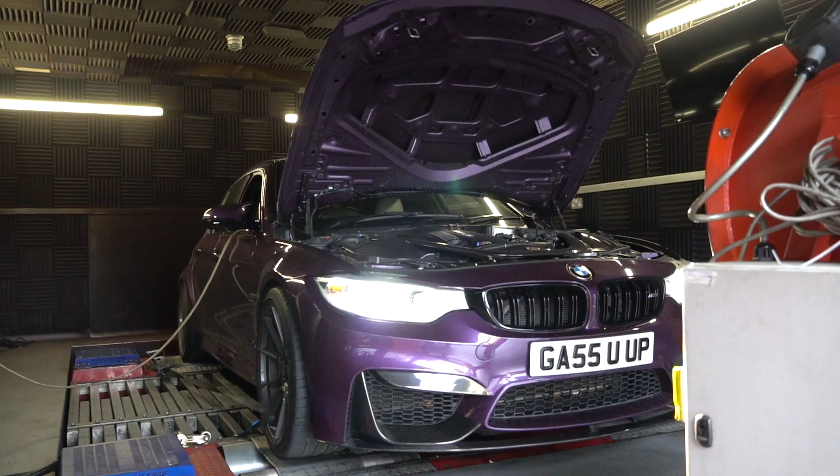Now today guys, we are back down at Devil Developments with the Littco team. I'm in the M3 and guys, today we are turning the power levels up. This should be sick, so stay tuned and let's get it.

So guys, yes, as the intro said, today we are down at Devil Developments. Unfortunately, I've got to kind of give you this quick talk in my car because we're on the back end of a crazy storm. It is so windy outside, you're just not going to hear what I'm saying. But anyway, finally, we are back down at Devil Developments with Littco. And we have my M3 and we're turning power levels up.

Those of you who remember the last video when I actually came down to Devil Developments with Littco and got the hybrids, the L640 hybrids fitted, would know that because at the time we didn't actually have the crank hub capture plate, we didn't actually turn the power levels right up. So all we've done is fitted the hybrid turbos along with some other bits and bobs, and we left it running on the stage 2 boot mod map that was already on.

Now we've actually had the capture plate fitted. In fact, I went back the following week and got the capture plate fitted, but because of time and everything like that, and because we wanted to get a custom tune on this, we didn't have time to do it then. So it's actually been a while since I put out any content on the M3, and a lot of people have actually been asking for it, and it's been a tricky one. I've just been kind of focusing more on the features, you know, my car features, and also the STLs, trying to get things running with that and get that off the ground.

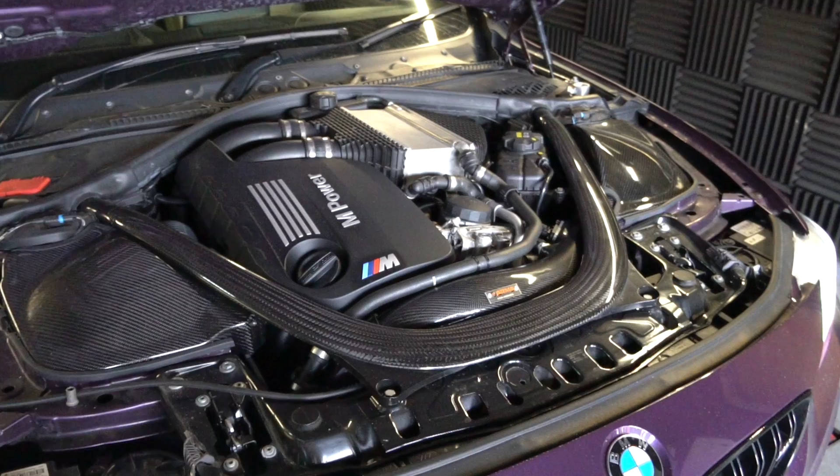So guys, whilst actually running on this boot mod stage 2 map with the hybrid turbos, it made 612 brake horsepower. Obviously the turbos weren't tuned to the car, but guys, honestly this car has not missed a beat. It's been crazy. We've actually had it down at some drag days. I'm sure some of you guys have seen that, literally racing supercars and some really high powered cars, and the car performed so well. Actually beat a Lamborghini Huracan Performante in one of the races, which was just incredible. As I say, the car, it's just performing like an animal anyway.

We're going to only be doing not a major adjustment, we're going to tune the turbos to the car, because they're not tuned to the car. It pretty much just drives like stock, which is crazy. Well, I say drives like stock, but there's no turbo lag. The turbos spool up real quick. I think it's like 500 RPM over stock, I might be wrong, but there's no noticeable difference with spool time really that I can feel, and the car just pulls like an absolute weapon.

So I'm not sure what it's going to feel like after today. Obviously I will let you guys know, and I'll probably do another drive and do some 0 to 60s, 100 to 200s, so we can just actually find out what this beast is capable of, and then just go from there. As I say guys, I'm not going to talk for too much longer. Let's get in there, see what's going on, and have a chat. Let's get it.

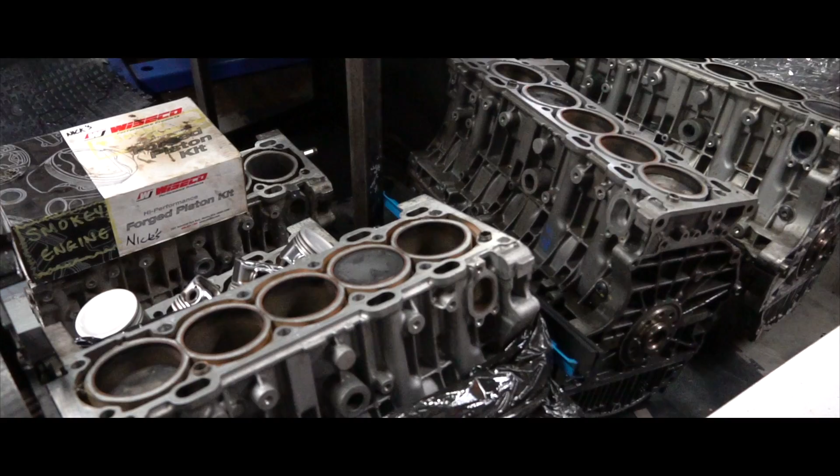All right, Ben. Hello. Back again. This time for a bit of a tune-up. Obviously, the last time I was here, we fitted the L640s, and we just ran it off the boot mod stage 2 because we didn't have the catcher plate at the time, just to keep it a little bit safe. So I'm back, and I just wanted you to kind of go through exactly what we're going to be doing. I know it's not a major process, but just to make things clearer. We're just going to send the boost up. Okay, it's as simple as that.

We're going to do a stage, well, a stage 3 tune, I guess. We're just going to custom tune it. Okay. Because there's nothing off the shelf available for it. No problem. Tune it and get the most out of it. Because at the moment, it's a safe tune, isn't it? It's 20 PSI, it's nice and safe.

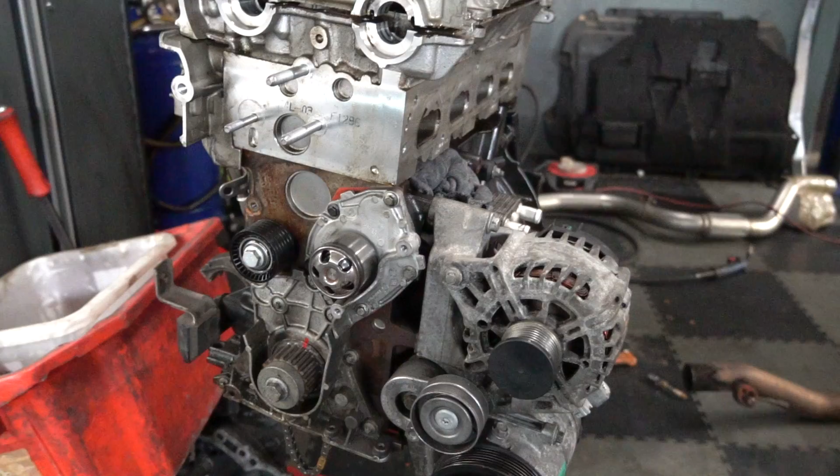We're not going to see the gains on this dyno, but on a Dynojet we've seen up to 680. So if possible on here, we want to see 630, 640. But wheel spin is the issue.

I thought it's worth going back over because I always get it, and even though we discussed prices on the last video, a lot of people missed that. They always ask me how much it costs to go from a stage 2 to a stage 3 with the L640s. Can you quickly run through that for us?

Yeah, so the L640s are £1,800, including VAT, and that's for the exchange units at the moment. If you want to buy them outright, you need to add about £1,400. So if you want L640s, they're £1,800 including VAT a pair, both of them, but we need your old ones back.

If you want them fitted, you need to add £650. So basically, if you want 640s fitted on a stage 2 boot mod map, with the gearbox tune as well and that sort of stuff, where you were before to where you are now, it's 2,950 all in, everything. It's an amazing price, I think it's great.

Then if you want to add a capture plate, it's £400. And if you want us to do a custom tune, you need to add about £450. So it's incremental, but if you've got smoky turbos and just want to get something on there, it's £3,000, which is reasonable.

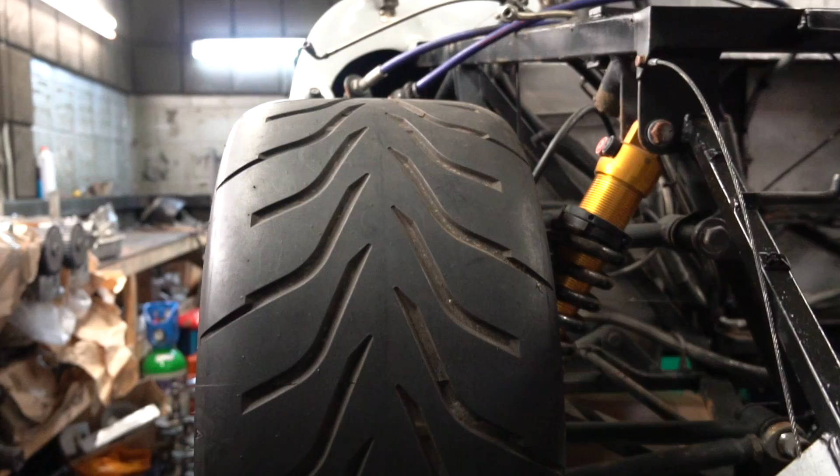I wanted to touch on, you guys are just about to drop, or you've just dropped, the L700 turbos. They're pretty good, just under a pure stage 2, great turbo, but slightly smaller, ever so slightly. So we're hoping they'll be a little bit quicker, which might suit a bit better. We don't know yet, but they should make sense. They're going to be epic.

Have we got pricing on them yet? They're basically £400 more, so you need to add £400. It's not a lot, is it? It's not a lot. So these prices are amazing.

So fitted, you'd be looking at £3,400 with a stage 2 map. But realistically, you'd want to have a custom tune as well. So the 700s fitted, mapped, custom tuned, with a crank hub and all the rest of it, it's going to be about £4,000. That's not bad.

Well bro, let's not talk too much more. Let's get into it. Let's do it, bro.

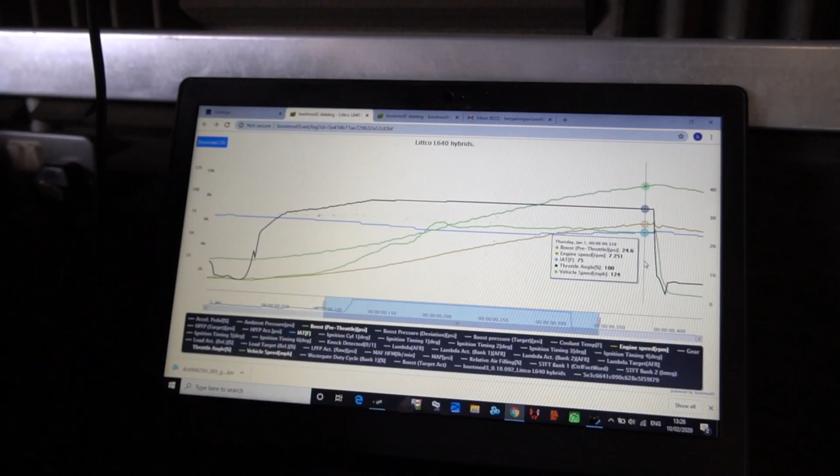So guys, now we've got the vehicle on the dyno, before we give it a run, because we've turned the boost pressures up and things like that, we are going to adjust the spark plug gaps, since we're running a bit more boost, just to err on the side of caution and make sure everything's right, then give it a run. Ben's going to take them all out and do all the gaps, and then we're going to give it a blast.

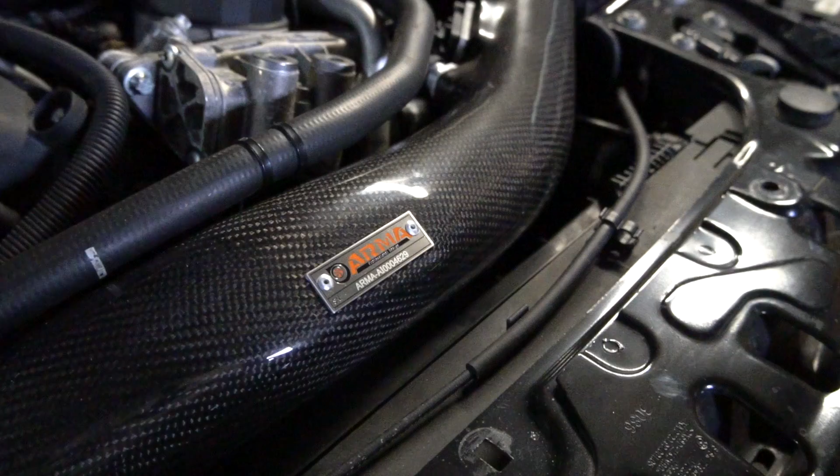Ben, so it's that time now, we're actually flashing this new map on. I thought it would be better for you to explain exactly what we're doing now, because I always mess it up. Well, basically just doing a custom tune for the car.

So before we had the off-the-shelf stage 2, which was 19 PSI and crept up to about 21 at top. Obviously we've been doing a lot of tuning on my car, which is identical, and we found it's best about 25 PSI, down to 24 at top.

As far as power figures today, this dyno is not the right dyno for this car with this kind of power, it will struggle. We do Supras and the big turbo cars, they make their torque a lot later, and that's the issue, this makes so much torque so early it will just wheel spin.

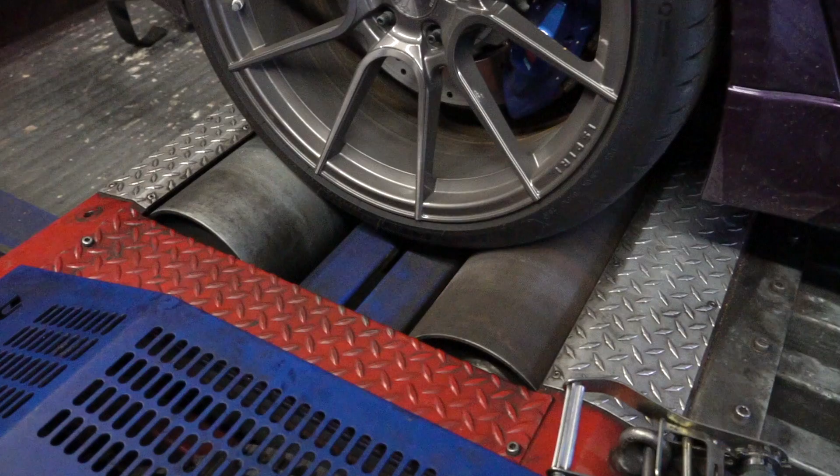This is only driven off the front roller, off this one roller here, and the diameter of this roller is quite small. With a car with that much torque, it just wants to climb out and wheel spin. Whereas the dyno jet has one big wheel roller, so you're not going to wheel spin on it. Well, for science's sake, we'll have a little play. It's safer for us to set it up in here than on the road, and that's why we're doing it.

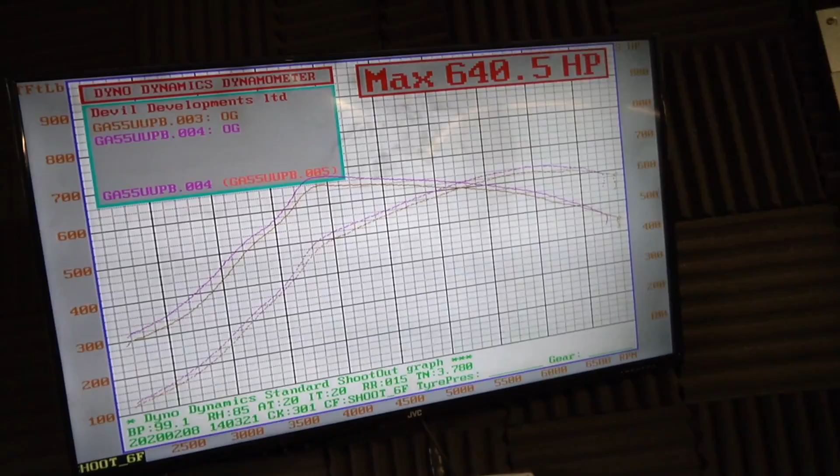640, well, 640.5 on the nose. LP640s, 640.5 brake horsepower. There you go.

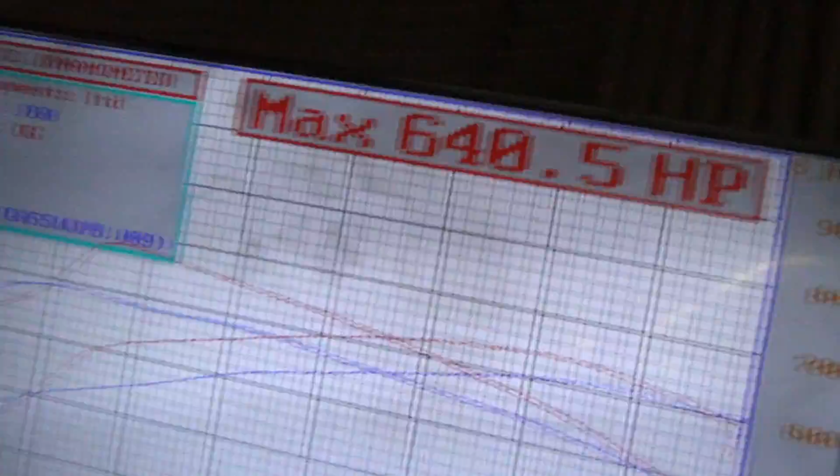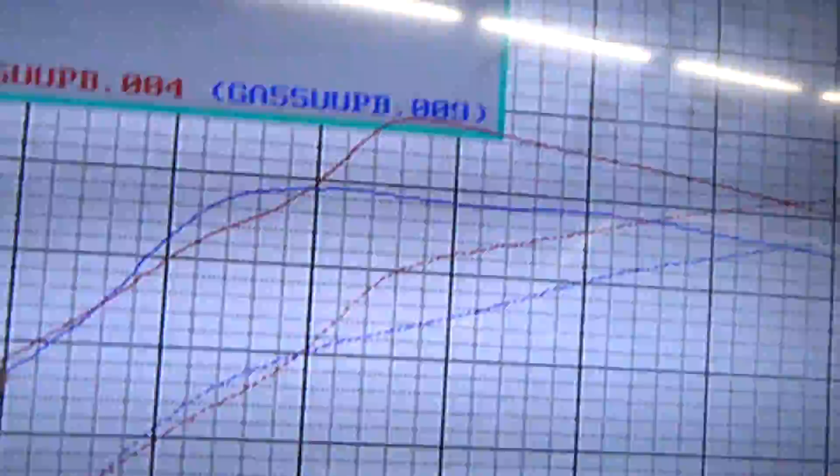As I say, we were getting a little bit of wheel spin, and also we were exceeding the max speed of the dyno, which we knew was going to happen. Going back to having it on a dyno jet, we're probably getting a little bit more power. What I want to show you too, which is crazy, is we're now running 640.5 brake, and this red line, the red ones, are our new map compared to when it was running on an off-the-shelf boost mode stage 2 map.

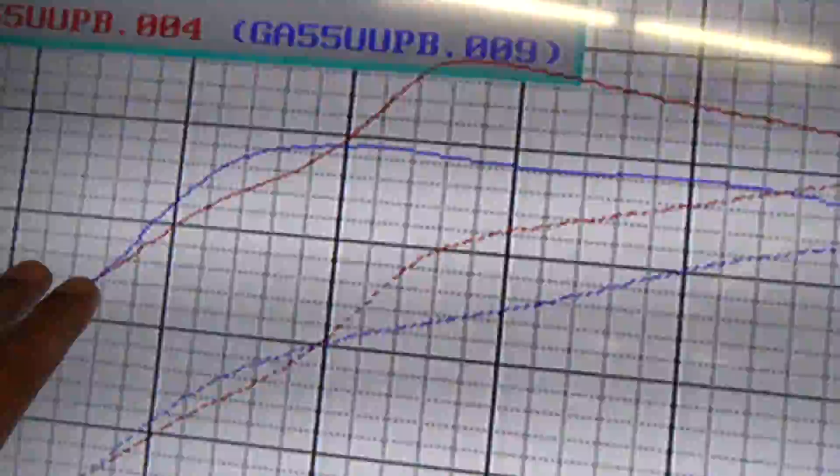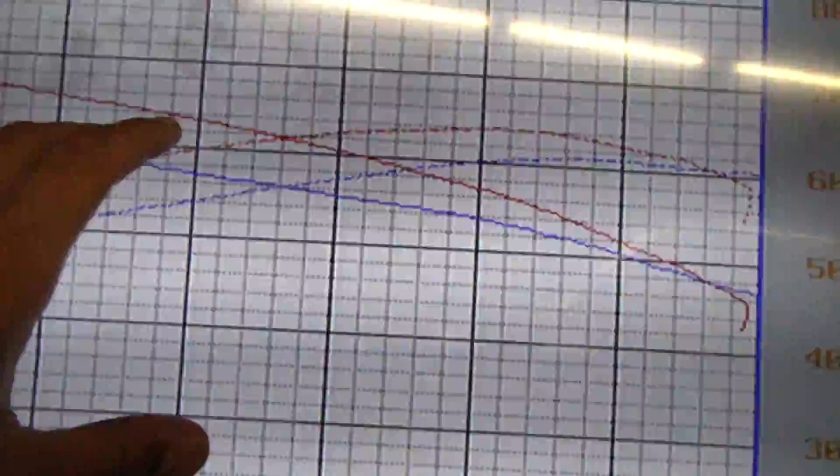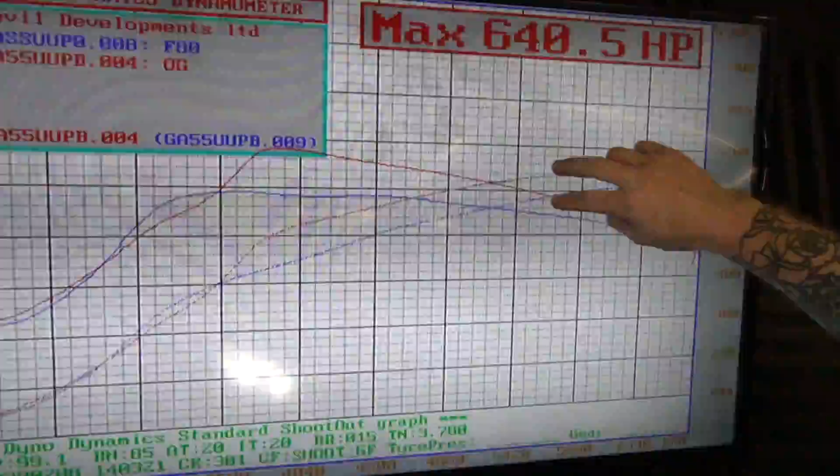On the boost mode stage 2 map, it made 612 brake horsepower and about 590 pound-foot of torque. But now, on this map, we are making near on 700 foot-pounds, we're making 690 foot-pounds of torque, so it's near on 100 foot-pounds more. And an extra, I don't know, about 30 brake. So although the peak power is only 30 horsepower apart up here, down here you're at sort of 70 horsepower difference. So the mid-range, horsepower coming up to 70 horsepower.

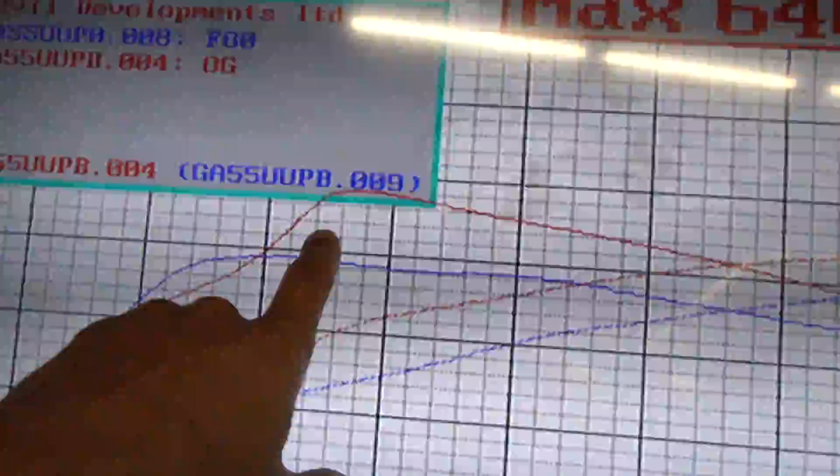Same as the Fiesta, small peak number gains, but the actual on-the-road gains are going to feel a lot better. So there you go, guys. Result, as I say, the torque is the talking point really with this one. I've done a little conversion, I think it's around 935 Newton meters, which is just crazy.

And the maps, you're happy with everything? Yeah, everything looks good, feels good. Ethanol on it will make a bit more. Well, that's the thing, we have got places to go with this. We could put some meth in it and just go from there. You can go as crazy as you want, really. So, but for now, I'm happy. Let me test it on the road and see how it goes.

But yeah, result. Also, guys, we have put an aggressive, and even more aggressive, overrun map on the M3, and now it is banging flames. Literally kicking out major flames, and it's deafening. It's crazy. We're gonna get Ben to come outside and rev her up and show you what it's made of, because it is so loud.